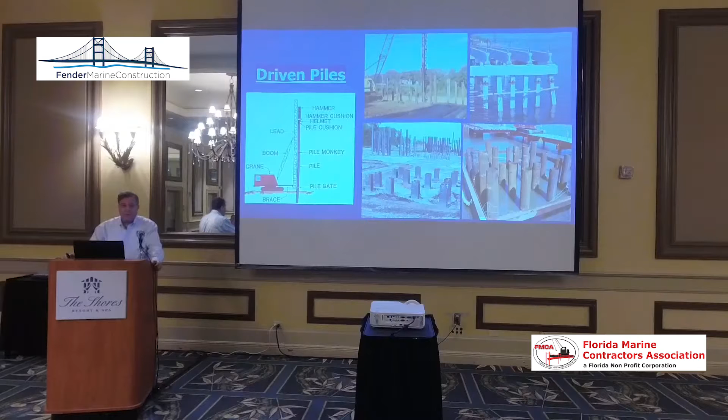For the longest time, by that I mean thousands of years, piles were mainly timber piles, nothing but timber piles, until relatively recently, like the last 100 years or so. Now we use timber, concrete, and steel piles. There is a manual you can download for free also from the Timber Piling Council on the design and construction of timber piles.

Timber piles nowadays are used for supporting all kinds of structures as well over water. They are also used as a ground modification technique where they drive these piles into the ground to improve the load-bearing capacity. Steel piles come in 2 varieties, H piles and pipe piles.

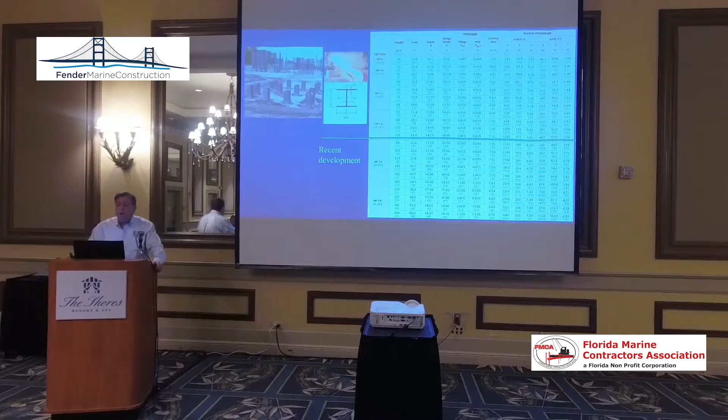Up until about 10, 15 years ago, we used to have about a dozen size standard profile H piles. Since then, they have doubled that. So now we have piles that are extremely huge, up to 18 inch in size and 200 pounds per foot. Imagine 200 pounds per foot of piling. So that is a very, very hefty pile that will be able to support all kinds of high loads, not only axial, but also for lateral support.

Pipe piles come in a variety of sizes, ranging in diameter from a few inches, they call it micro pile or mini pile, to a foot or 2, to maybe 5 feet, to maybe 15 feet in diameter. So all kinds of sizes are available, as well as length. Some of these pipe piles can be 1,000 feet long, 1,500, 2,000 feet long for offshore marine applications, for, let's say, oil rigs and natural gas rigs out in the ocean.

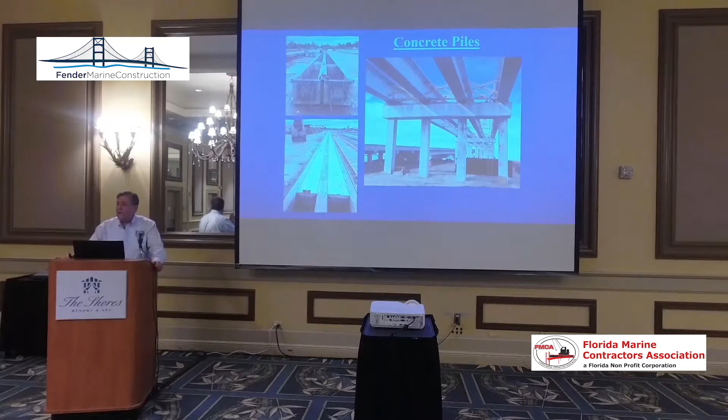Concrete piles, by that we mainly mean pre-stressed concrete piles. Specifically, almost always square pre-stressed concrete piles. The strength of this concrete is about 6,000 psi concrete strength. We may also have some post-tensioned spun concrete piles that have higher strength and larger in size typically. The strength of these may be 8,000 psi.

The newest application of concrete in piling is the use of ultra-high performance concrete, the strength of which is up to 25,000 psi concrete strength. This is the very first such pile driven anywhere done here in Florida. Piles are typically uniform and prismatic, but not always. They can be highly non-uniform in cross-sectional profile, as well as composite of concrete and steel, different combinations of materials and profiles, depending on the application.

There are literally hundreds of different hammer models of all sizes, of all makes, of all models and operations. They can be hydraulic, air, steam, diesel, single acting, double acting, small, large ram, high stroke, short stroke, big ram, all kinds of hammer combinations that may be used.

So when we drive a pile into the ground, the pile experiences a dynamic pile driving resistance. However, when we use it to support a structure, we need to know its static load-bearing capacity. There is a difference between the static load-bearing capacity of a pile and the dynamic resistance it experiences during initial driving. The best way to evaluate the static load-bearing capacity of a pile is to perform a static load test.

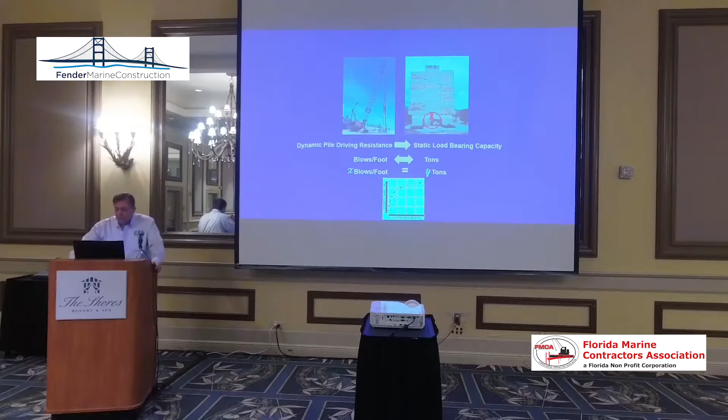Engineers involved in pile driving for a long time now have realized from common sense that the more energy it takes to drive a pile, the more effort, the more work it takes to drive a pile, the better the pile would be, the more load it should be able to carry.

So a Mr. Wellington, in the late 1800s, in 1888, wrote a one-page article in the Engineering News magazine equating that energy of the pile by way of weight of hammer and drop height, the blow count, and the load bearing capacity of the pile. So that was done in 1888.

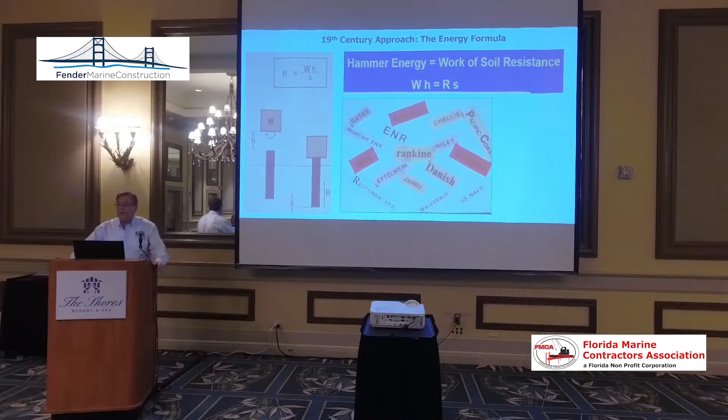Since then, a lot of people tried to improve on that, tried to adjust it, tried to accommodate it for new technologies. Because back in 1888, we only drove timber piles, nothing but timber piles, nothing but drop hammers to very light loads. So now, of course, we have much more complicated systems, and people tried to improve on that. But of course, using 1800s technology in today's practice is not very efficient or very good.

In the 1940s, another very smart engineer called Mr. Smith, realizing what happens during the impact of a pile driving hammer, recognized it as a problem of wave propagation. When the hammer hits the top of the pile, it generates a stress wave, a shock wave, a compression shock wave that travels down and up the pile, very very fast, like 15,000 feet per second, but it's finite.

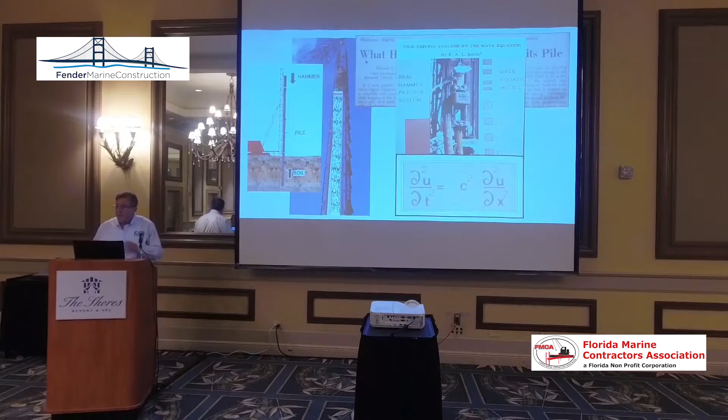So Mr. Smith, realizing that and knowing the formula, described the one-dimensional elastic propagation in long elastic bars. It applies to pile driving. It also applies to heat transfer, for example. If we have a very long steel rebar and we take a torch and heat up one end of it, that heat transfers along that bar in accordance with that wave propagation, described by that wave equation. So this is the wave equation describing that.

Mr. Smith wrote a computer program to apply this wave equation to the fundamentals of dynamics of pile driving, utilizing stress wave mechanics. It sounds like I'm saying a lot here, but the point is, this is the first application of digital computers in civil engineering. The very first computer program ever written in civil engineering was this program, written in 1948 by Mr. Smith, to follow the stress wave along the length of the pile so that we can actually relate the pile driving blow count and pile load bearing capacity.

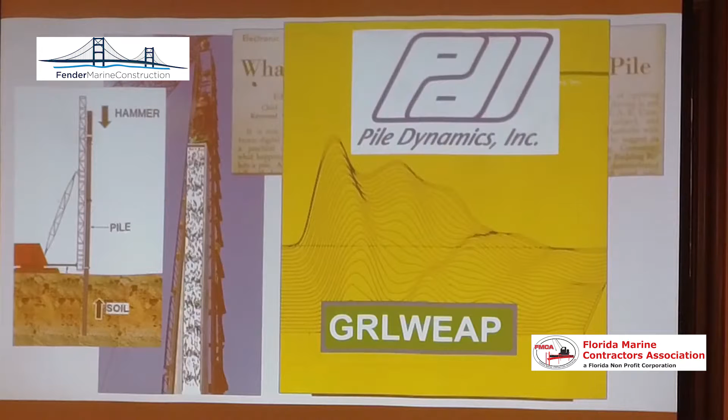So Mr. Smith wrote that program for in-house use at the Raymond Company. The United States Highway Department heard about it, and they commissioned our group in Ohio to write a public domain program back in the 1970s. In the mid-1980s, the government said, you wrote the program, if you want to commercialize it, we don't want to support it anymore. It's well known now, everybody uses it, but we don't want to support it. Go ahead and commercialize it if you like. So we took it over, it's our own program now, and the commercial version of it is called GRLWEAP.

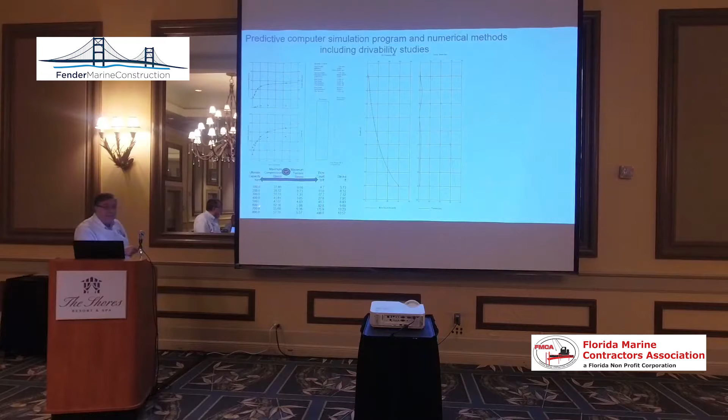That is the dynamic testing, the dynamic analysis program that is used worldwide, everywhere, to analyze the dynamics of pile driving. It's a very powerful program because it allows for a relationship between pile driving blow count and static load bearing capacity. So if we know how much design load the pile is supposed to have, let's say the pile is supposed to have a design capacity of 500 kips, we know we have to drive it until we get so many blows per foot.

That way the inspector on the job site can use this unit called the saximeter, which means a meter of sound, listening to the hammer and counting the blow count, blows per foot, to make sure that every pile is driven to the required blow count to achieve the required ultimate load bearing capacity.

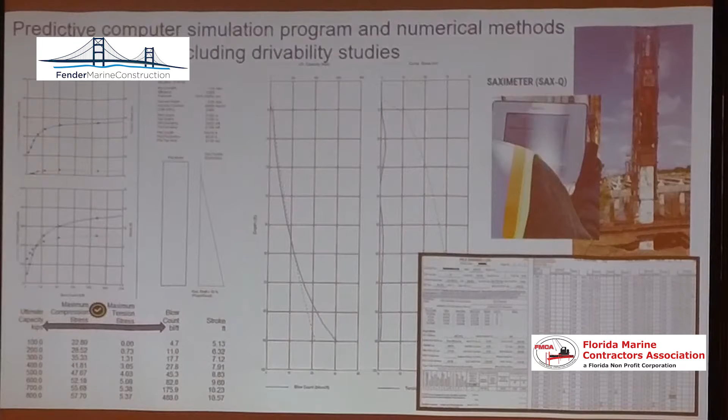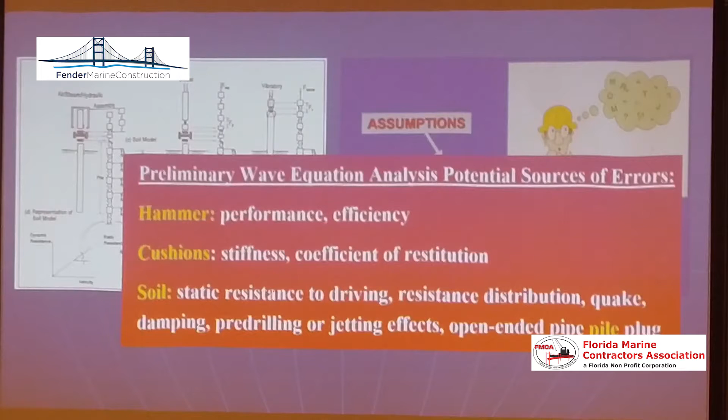Very nice, it's a very powerful way of doing quality control on pile driving. However, to set up that model in the program, remember it's a simulation. We're simulating pile driving in the computer analysis, so we need to use assumptions. We have to assume a bunch of information, parameters, and models. Because of that, the analysis itself has potential sources of error.

So the people who wrote the program, knowing that they need assumptions to set the model up in the analysis, got to thinking, what if we were to go out there on the job site and take measurements? What if we were to measure what we need to know instead of assuming it?

These included Professor George Goble, assisted by graduate students Dr. Frank Rausche and Garland Likins, under a program between 1964 and 1976 in Cleveland, Ohio, at Case Western Reserve University, funded by FHWA, FDOT, and various highway departments.

They invented the whole idea of dynamic pile testing. They invented the principles, the instrumentation needed, the sensors, the computer science, the engineering, and the formulas needed to analyze all of these measurements.

So that is what is now known worldwide as dynamic pile testing, utilizing the pile driving analyzer for field measurements and corresponding data analysis using the CAPWAP program. CAPWAP is a computer program, Case Pile Wave Analysis. It's a wave analysis program, but rather than relying on assumptions, it now uses the measurements on the job site as input to the analysis.

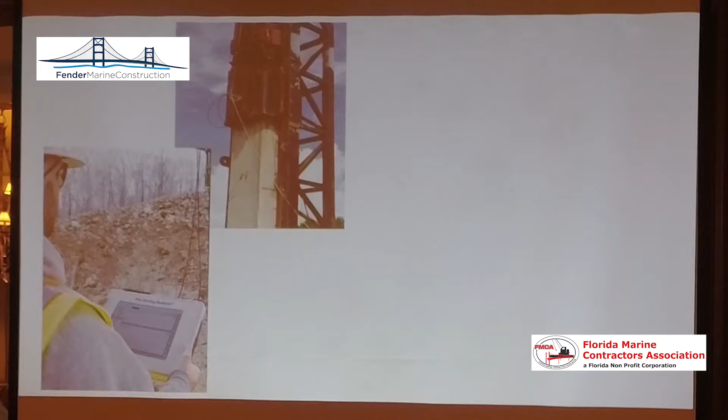These instruments measure the load and the movement of the pile. The load is measured with a strain gauge, and the movement is measured with an accelerometer. Remember what we did with the static load test, we measured load and movement. We're doing exactly the same thing now, measuring the load and movement of the pile under the impacts of the pile driving hammer. There is an ASTM standard for this testing procedure called ASTM D4945.

Dynamic testing can be done with the testing engineer and the PDA unit, the pile driving analyzer, on the job site, right next to the hammer. During the driving of the pile, the testing engineer is there to do the testing.

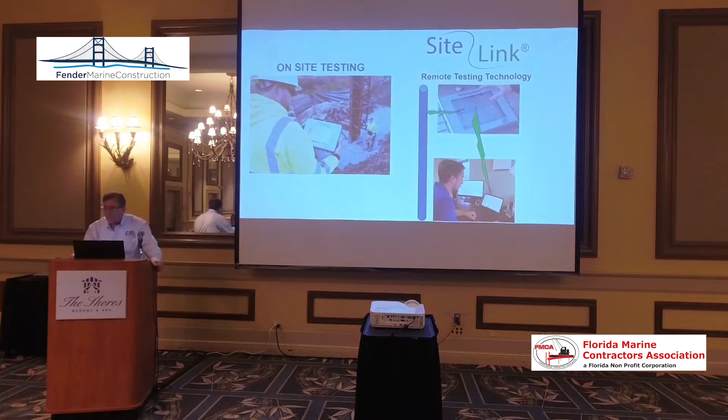Alternatively, this testing can be done completely remotely. The engineer can be in the office, and testing can be done on the job site in real time using SiteLink technology. So dynamic testing is nothing but the measurement of pile load and movement under the impact of the pile driving hammer, and the analysis of these measurements using stress wave mechanics.

These instruments are reusable and they can be attached to any kind of piling.

Pipe, H-pile, concrete, timber pile. These are very small instruments, 3 inches long, and they can also be attached to cast-in-situ deep foundations like auger cast piles and drill shafts for testing also. So when the hammer hits the top of the pile, it generates a shock wave, the compression wave that travels down the pile length.

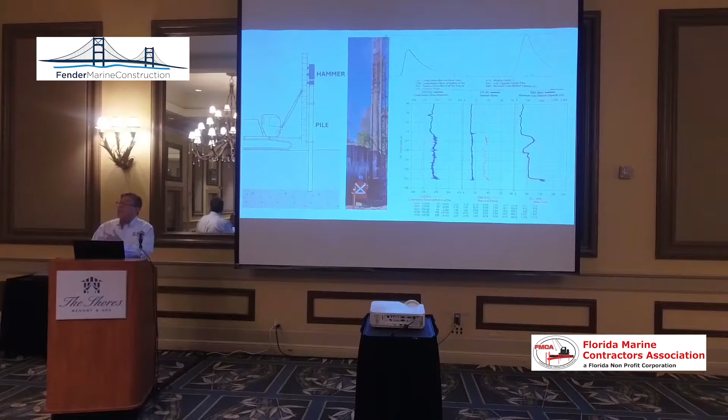So now we have everything we need to know. We know the blow count versus depth, and we know the static load bearing capacity versus depth, in addition to a lot more information, including hammer performance, pile performance, and soil performance.

Hammer performance is extremely important because we are using the blow count from the hammer, so many blows per foot, 50 blows per foot, 30 blows per foot, whatever blows per foot we are driving with, we're using that blow count to correlate to the load-bearing capacity, to the resistance of the soil. Except that blow count is not only a function of the resistance of the soil, it is also affected by the performance of the hammer. That affects the blow count.

So how do we figure out what blow count means for capacity if we don't know what the performance of the hammer is? We have to measure that. We do that by measuring the energy that gets to the pile.

Now let me ask you this. If I have a hammer with a rated energy, maximum energy, how much of that energy do you think gets to the pile percentage-wise? How much percentage the pile actually sees as a maximum energy of the hammer? Say a number, any number. Mike? 60%. You? 50%. It could be anything.

Now, why does it vary so much? It varies so much because that depends on the mechanical condition of the hammer, the state of maintenance of the hammer, the condition of the cushions inside the hammer itself, and the cushion on top of the concrete pile. All of these play together into that variability. It doesn't matter what it is as long as you know what it is, because then you can quantify the performance of the hammer so that you can make sense of the blow count as far as evaluating it for load-bearing capacity. We just have to quantify that hammer performance.

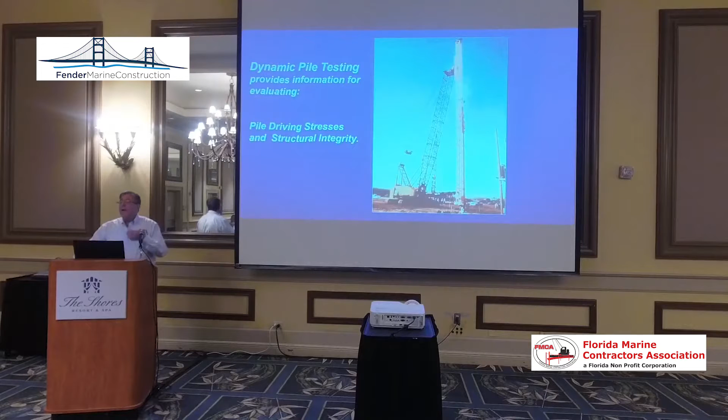So that is done for each and every blow of pile driving. During the impacts, the pile hammer on the pile undergoes a very complex state of stresses that includes compression, tension, shear, torsion, bending, and buckling. Every possible combination of stress you can imagine, the pile will experience, up to the maximum strength level, repeatedly 1,000 times during pile driving. So how do you think the pile feels about all that?

We were curious. We got to that pile. Hey, pile, how do you feel about that? Not so good.

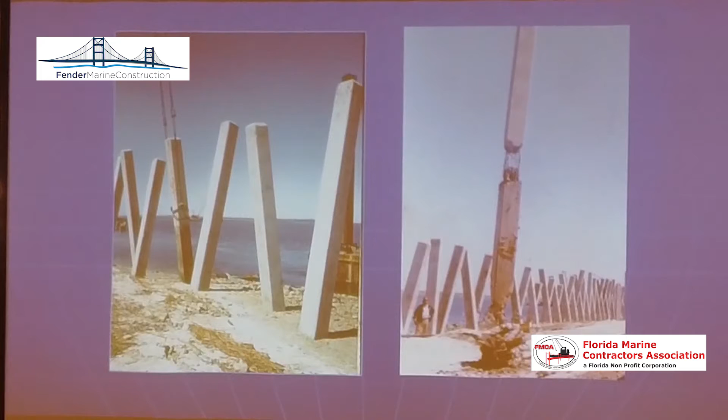It shouldn't be really surprising because of the process that we go through in driving these piles into the ground. Piles get damaged at the pile top, which means that the hammer is too big. When the hammer hits at the pile top and the pile top crushes, it's not the material, it's not the wood, it's a pile hammer combination. So that's too much energy.

By taking measurements on top of the pile, we know how much stress we have. We can control the energy of the hammer to lower the level of the stress in the pile to avoid damage. We do that by lowering the stroke and/or increasing the cushion thickness in the case of concrete piles. So it is a measurement that we take at the top of the pile. It's a dynamic measurement, which means that it's a measurement over time.

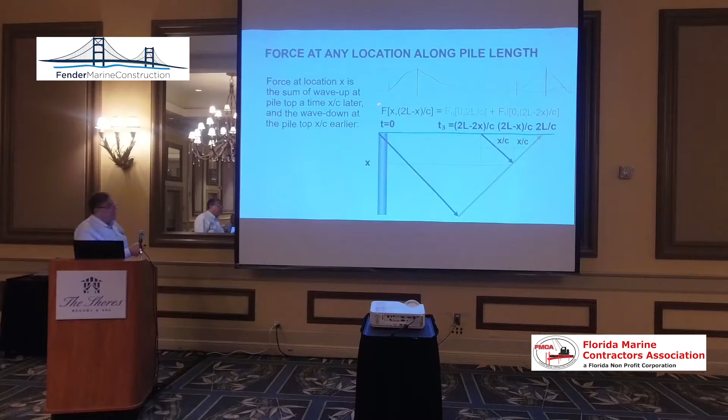By the way, that time I'm talking about, between impact and reflection, is like 20 milliseconds. Very fast, but finite; computers can handle that. So it is a measurement on top of the pile versus time. We know how fast the wave goes in the pile. So now I have time and speed. With time and speed, I can go back to distance. Distance, time, and speed are linearly related. So if I know time, which I'm measuring, and I know the speed, depending on the material, I can go to

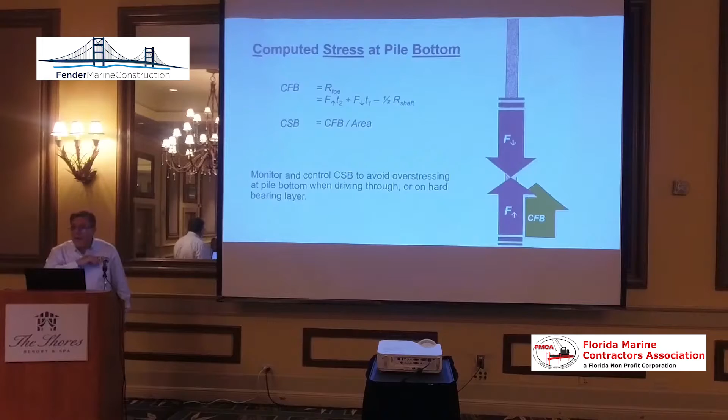distance. Therefore, from the measured data at the pile top, we can calculate the stress level at any location along the pile length. At any location X, we know how much stress the pile has from the top measurements, including X equals L, the full pile length. So when we drive a pile into the ground, if we're driving it to a very hard end-bearing layer, the stress at the bottom of the pile could be twice that at the top of the pile.

Because at the top of the pile, when the hammer hits the top of the pile, we have so much stress, right? So much compression stress. That compression stress travels down the pile length to the pile bottom. It activates an equal and opposite reaction from the rock. Both in compression, they both add up at the bottom. So therefore, the bottom stress could be twice that at the top of the pile.

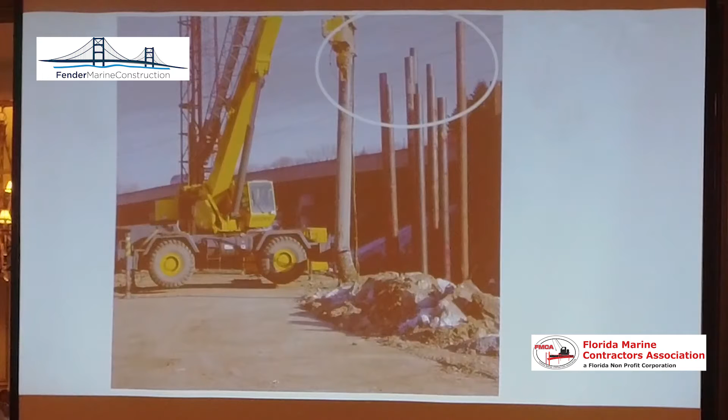This is a project where they drove all of these piles into very, very hard rock. Supposedly, these piles penetrated differently into that hard rock, but not really. After extraction of some of these piles, look at the bottom of the piles. This is an illustration of the doubling effect in the stress as it happens as I drove these piles blow by blow by blow.

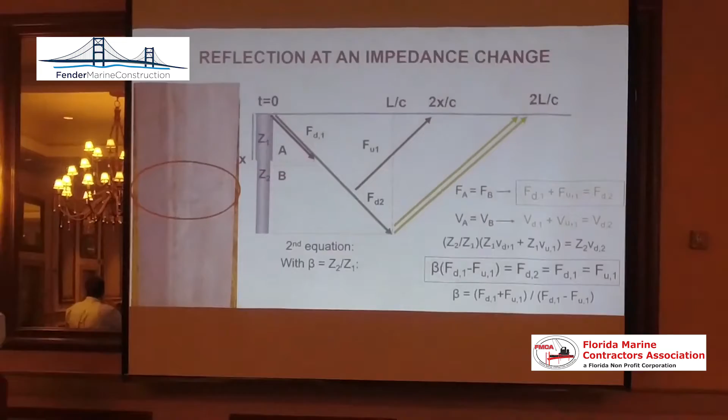So when we drive a pile and we have end bearing, we know what happens at the tip of the pile. Let's say we are driving a pile without much resistance, like early driving. Not much resistance. That compression wave on top of the pile travels down the pile length, compression, compression, compression, gets to the bottom of the pile, tries to pull the pile down. By pulling down on the pile, it elongates it, puts it in tension. If we're driving a concrete pile and that tension was too much, the pile will crack. All of these cracks and damages will send back wave reflections in the data that can be evaluated for location of damage and amount of damage on the pile for each and every blow.

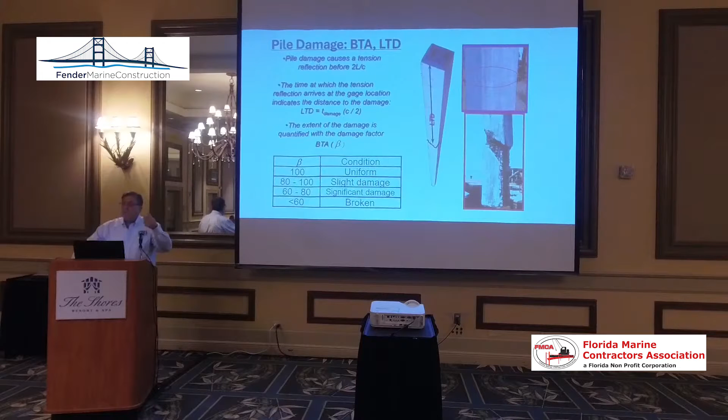Remember, this is happening, the performance of the hammer, performance of the pile, stresses, integrity, and so on, between hammer blows. The hammer runs at about 50 blows per minute, approximately one impact per second. Every second, we have a test done and we have results available immediately within that 1 second.

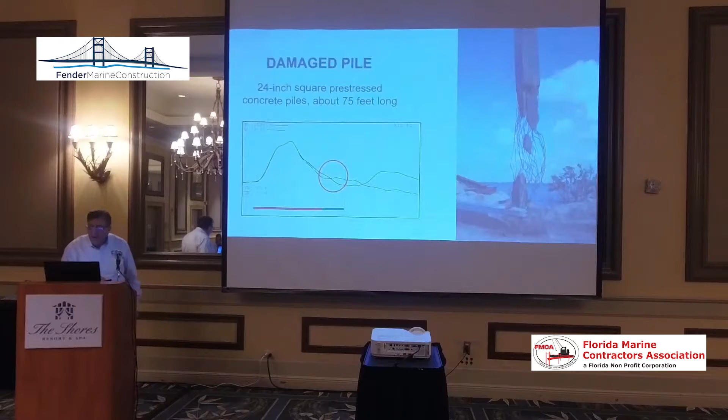This is some data showing partial damage in the concrete pile. If the pile tried to walk, we're going to have partial damage on it, just on the one side. Or we may have complete damage on a pile, in a concrete pile, or a steel pile. And that damage on the pile will be indicated in the test data. Remember, impact at the top of the pile, reflection from the bottom. Now we have that from the bottom down here, but we also have an early reflection from right here. So that data indicates the amount and type of damage.

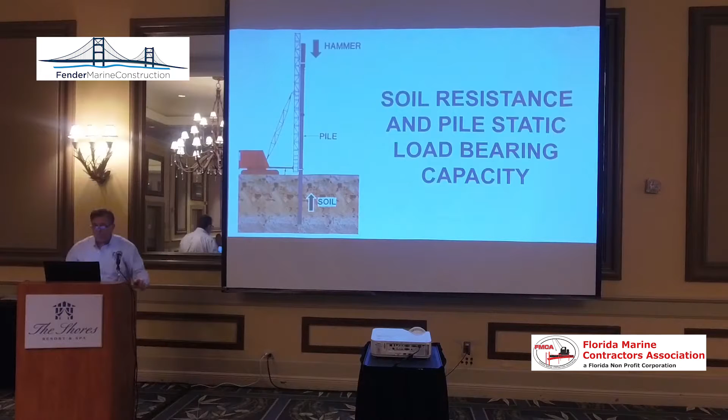So we talked about hammer performance and pile performance. Now let's talk about soil performance. Remember, all of this is happening within that 1 second before the next blow comes. When the hammer hits the top, the pile moves into the ground. As the pile moves into the ground, it activates soil resistances in skin friction and end bearing. These soil resistances also generate a stress wave that goes up the pile.

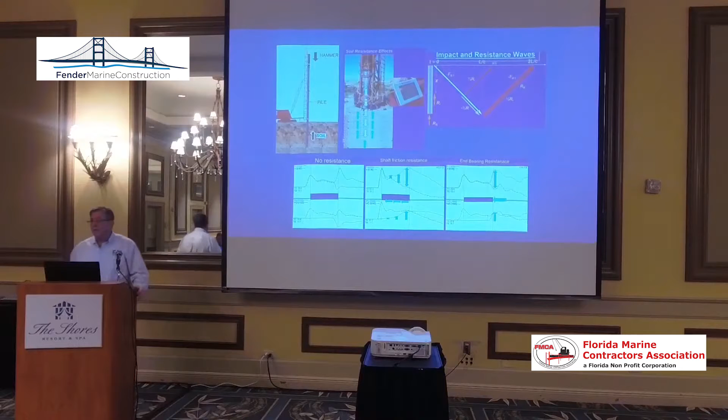So now I have two waves on the pile, the wave going down from the hammer and the wave going up from the soil. Both of these waves get captured with the instruments on the pile that the PDA sees. So under the impact of the hammer, we have the wave going down and the wave going up from the soil. From these waves then, we're able to tell how much skin friction we have along the length of the pile and how much end bearing we have during each pile driving hammer blow, during each penetration depth.

Since this is so convenient to do, we'll test the pile during initial driving and later on in time. When we drive a pile initially into the soil, we disturb the soil, we weaken it. So we have so much capacity. But over time, the soil consolidates, grabs onto the pile, and the load-bearing capacity increases in a process called setup. So the pile soil setup, which means it increases capacity.

In this case, within 30 minutes, the capacity increased from 200 to 280 tons. Free capacity in half an hour. So that's the good news. That's what happens in most cases, but not always. Sometimes the pile capacity actually decreases with time in a process called relaxation. So under certain circumstances, conditions, pile soil interaction type, the capacity will decrease in time. This process is known to happen in Florida.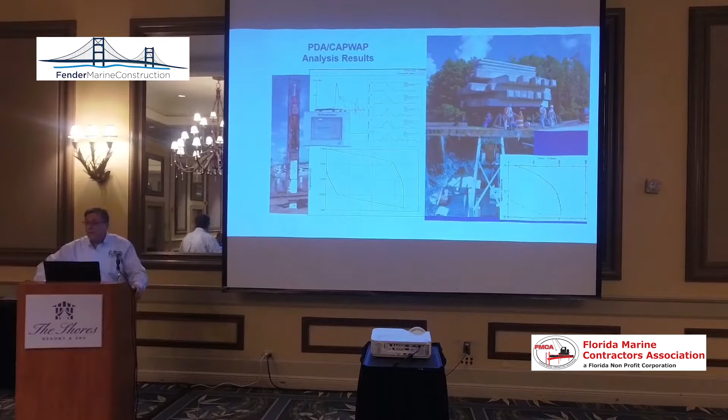Well, how good is it? How does it compare to an actual full-scale static load test? Over the last 50 years, there have been many correlation studies by professionals, by highway departments, by universities, by dissertations, by students that look into this correlation. I'm going to only show you two cases, since we're in Florida, from Florida, that were published by the American Society of Civil Engineers. This is a job not far from here where they did both static load testing and dynamic testing. And this is a correlation, excellent correlation.

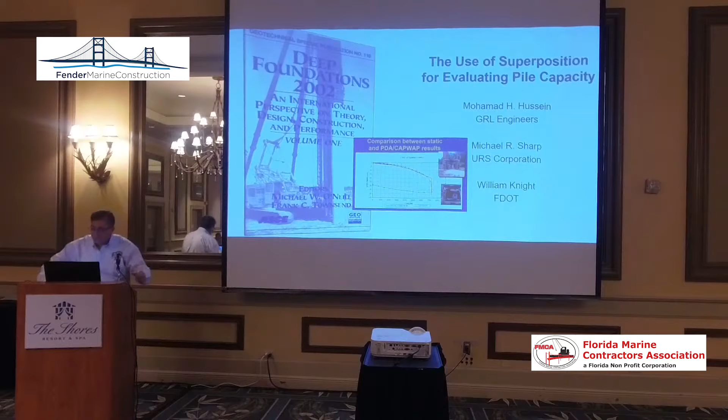There's another job up in the Panhandle that also shows a good correlation between the simulated from dynamic measurements and full-scale static load testing. So if the data quality is good, if the analysis is done properly, one can expect to have excellent correlation between a static load test and a dynamic load test without having to run a full-scale static load test.

This type of dynamic testing is typically applied on projects by way of a test pile driving program. The design engineer will designate a number of piles on the project, a handful of piles, go ahead and hire the contractor, drive the test piles, and dynamically test them. The purpose of that program is to establish production pile lengths for the job, establish a pile driving criteria for the project, check the engineer's design assumptions, and also check the contractor's equipment and means and methods to do the job. This has been the way for 50 years.

Recently, as this year, in Florida, the FDOT decided that they want to do 100% testing on each and every pile. Each and every pile driven in the state of Florida for the DOT is dynamically tested, 100%, with or without a test pile driving program. All of these projects were done with 100% testing, including the Pensacola Bridge next to you there. So that was a lot of testing there.

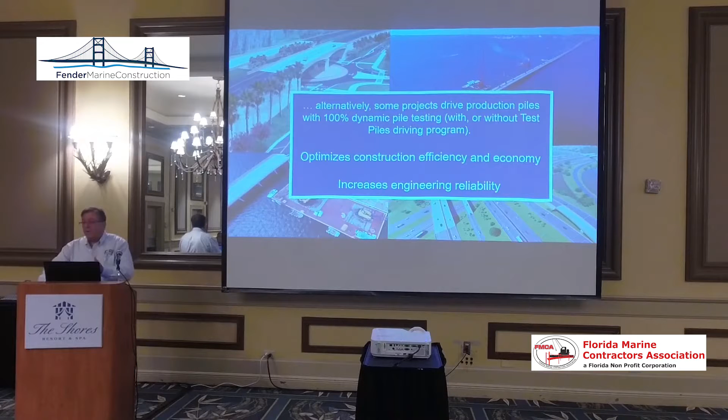They figured out that the process of doing 100% testing optimizes construction efficiency and economy and increases engineering reliability. Now the design engineer knows by verification of testing that each and every pile on the job is verified for load bearing capacity and integrity, which would allow for the use of a much lower factor of safety in design, which will make the foundation a lot more efficient and economical.

On the flip side to that, however, one would have to predetermine the production pile length for the job without the benefit of the information that one would obtain with a test pile driving program. In many cases, this works fine. In many other cases, not, especially in Florida, because it's very difficult to predict the length of the pile without actually checking it because of the geology and the karst conditions that we have. So that was the discussion on driven piles.

Next, I will move into deep foundations that are cast in place, cast in situ, starting with auger cast piles. Auger cast piles have traditionally been used to support structures, buildings of all sizes. Most of the buildings in South Florida, East and West Coast, high-rise, these tremendous buildings, are mainly founded on auger cast piles. Recently, they are now being used on bridge foundations. This is how an auger cast pile is installed.

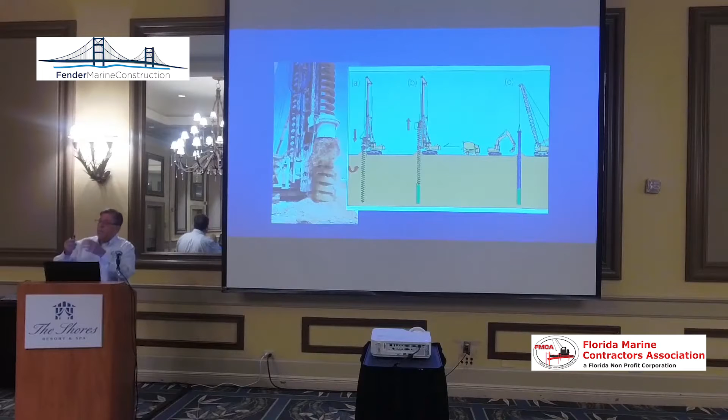To install it, the contractor would have a continuous flight hollow stem auger. The design engineer will determine the depth, so the contractor would drill down to that depth and withdraw the auger. During the auger withdrawal, he pushes grout through the bottom of the hollow stem. And by the time the auger is all the way out, we have a hole full of grout. Then we'll bring the steel cage and push it down. The steel cage comes last, and is pushed down that grouted hole. That was the conventional way.

A newer way is called a displacement type auger cast pile. Notice that at the bottom of the auger, they reverse the direction of the flights. That way, we're not mining the soil, we're not taking soil out of the ground, we're actually pushing it, displacing it in the ground. So, displacement type auger cast pile. This has many advantages. Not only does it improve the geotechnical conditions, but if you happen to have a project where the soil is contaminated, taking any ounce of soil out, you have to process it. In this case, you don't worry about it. It's still down there where it is.

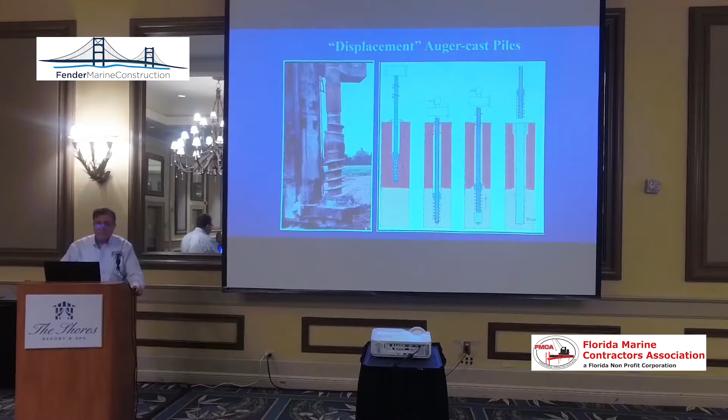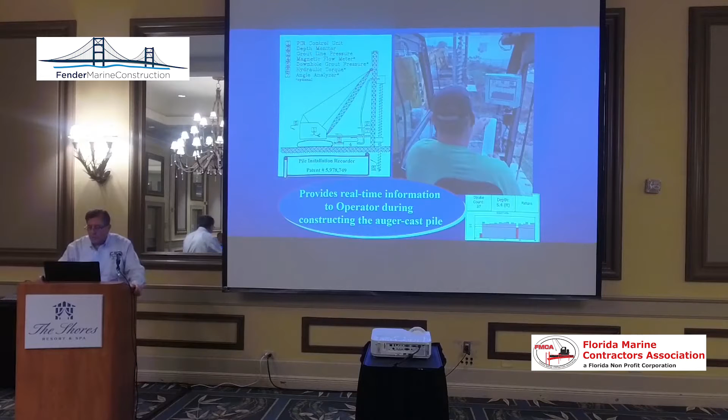These rigs to install these piles are typically fitted with equipment that measures while drilling. The hottest topic in engineering now at the University of Florida and everywhere is research on MWD, measurement while drilling. Take measurements of torque, pressure, grout pressure, depth, volume, all kinds of information to make sure that each one of these piles is done properly.

Drill shafts, on the other hand, are also cast-in-place deep foundations, but very different than auger cast piles. Typically characterized by much larger sizes, while auger cast piles can be 12-inch, 16, 20, maybe 24, up to 36-inch. These are the largest I know of, 36-inch in diameter auger cast piles. Drill shafts start at 36-inch or 48-inch, and they go up to 3, 4, 5, 6, 8, 10, 15 feet in diameter, and they can be 100 feet deep.

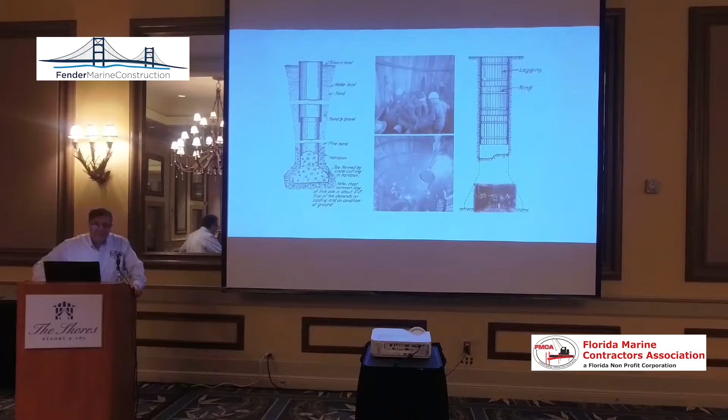By the way, the very first high-rise skyscraper was in the United States, in Chicago. This is it. This is the very first skyscraper in Chicago in 1885, 10 stories high, steel frame building. That was founded on a hand-dug deep foundation. They actually sent people all the way down there. And then they may have a bell on it. So now they have this hand-dug, 100 feet into the ground foundation for these buildings in Chicago. And they actually held a progress meeting down there in the bottom of the hole. They sent the engineers there.

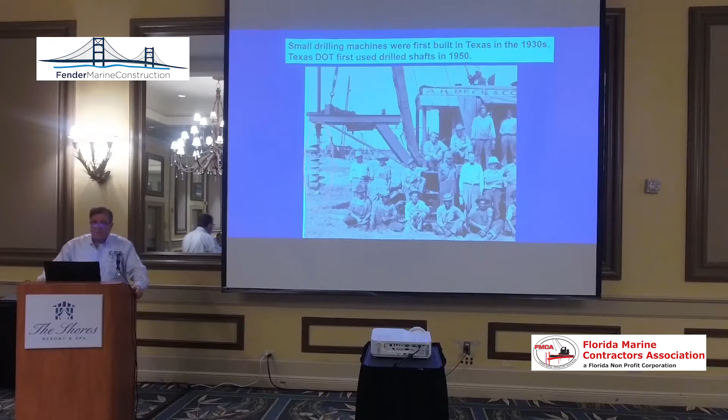The very first recorded use of drill shafts was in Texas in the 1930s as an outgrowth of oil exploration. So they would get this rig and drill for oil. If they found oil, great. If not, well, now we have a hole drilled. So they decided to put a steel cage in it and fill it with concrete. That was the original beginning of drill shaft construction. Texas took that in 1950 and it became standard practice for the Texas DOT for their bridge foundations.

The very first major use of drill shafts in Florida came in the 1980s following the disaster in St. Pete for the Sunshine Skyway Bridge. Remember when the barge hit it? The construction of the new bridge is founded on drill shafts.

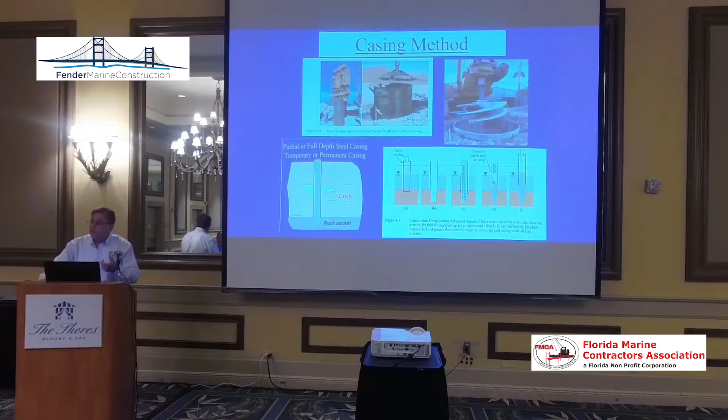So to construct the drill shaft, because of a water table, we may have to use a steel casing, temporarily during construction or permanently as part of the constructed shaft. We may also want to use slurry. Slurry is a thick fluid that we put into the drilled hole to apply hydrostatic pressure inside that hole to keep the wall of the hole from falling in as we construct the drill shaft. But that has to be done extremely carefully. That is why there are so many tests required on the slurry during the construction of the drill shaft.

Because the slurry has to have a certain density, because the hydrostatic lateral pressure it applies is a function of the depth of the hole and density. So we have to adjust the density sometimes by putting in sand. If we put too much sand, then the sand will settle at the bottom of the hole, so we're going to have a soft bottom. So the shaft will then suffer in end-bearing resistance. Also, that can stick to the side of the hole, which will then provide a slick plane between the concrete of the shaft and the soil.

So we're not going to have any skin friction either. So that will affect the load-bearing capacity of the shaft. That's why they do so much testing of that slurry, expert testing.

So now we have a hole, 100 feet deep hole full of slurry. We have to fill it with concrete. We do that from the bottom up. We do that with a tremie pipe, which is a very long pipe with a hopper up on top. We put the concrete in it. We take it all the way down to the bottom of the hole and start pouring concrete and picking it up a little bit at a time until we're all the way up on the top, meanwhile collecting that slurry up on top.

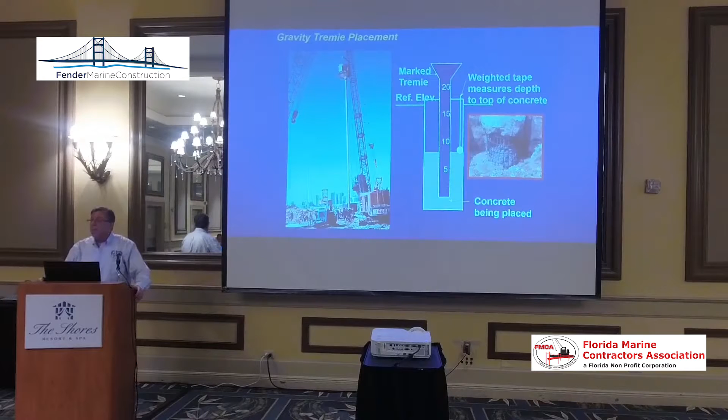Also, the design of these things, the steel cage and the concrete, have to be done properly so that the concrete will flow out through the cage and engage the side resistance for load-bearing capacity, friction resistance.

So when we drill that hole, before we do anything to it, only the hole itself, we have to test it for a few things. We have to test it for profile, the profile of the hole, and plumbness, verticality. We're drilling a hole 100 feet or more in the ground. It has to be perfectly plumb all the way through, within very little tolerance, like 1, 2, 3, 4% at most. We also have to test it for cleanliness and competency at the bottom so that we can have end-bearing resistance to the drill shaft. All of that before we put the steel cage and before we fill the hole with concrete to make the shaft.

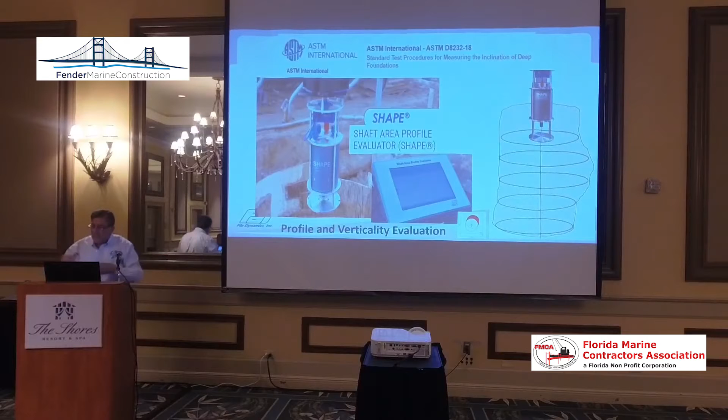The profile of the hole and plumbness, verticality are tested with this shape equipment; we send it down the hole and up real quick. It sends signals for reflections, like a radar type thing, and it gives us a 3D picture of the hole. It will also give us the offset between the top of the hole and the bottom of the hole to make sure that the plumbness requirement is met. It will also calculate the volume of the hole.

That is important because later on, when we fill this hole with concrete, we make sure that we have enough concrete in that hole, at least equal to the volume that we drilled, not the theoretical volume from the size of the drill, because the hole could be different.

The bottom cleanliness of the hole and the competency of the material at the bottom, to make sure we have good end-bearing resistance on that drill shaft, are tested with this equipment called SQUID, shaft quantitative inspection device, that has 3 little probes at the bottom, and they probe the bottom of the hole for stiffness, strength, and thickness. Typical requirements are that the bottom of the hole should not have any more than half-inch thick soft material on more than half of the area. So the area at the bottom of the hole is probed and tested that way.

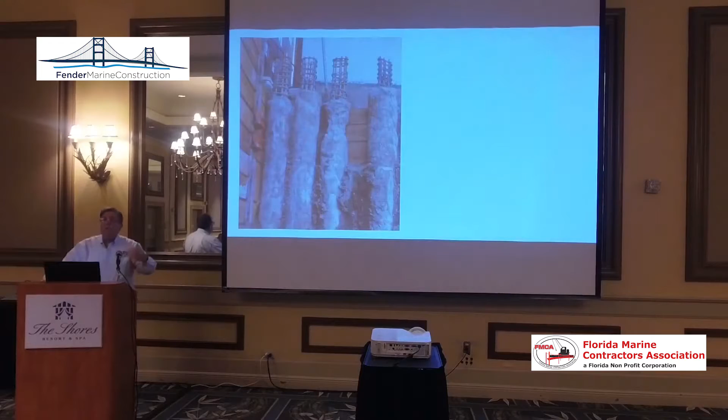So we do the best we can with the inspection and testing and the construction. We put the concrete, everything is happy, everybody's happy, everything is looking good, perfect. Well, maybe not perfect, but good enough. But sometimes it can be very bad. Remember, we're constructing something in the ground, in the blind. There are many factors that affect the integrity of these cast in situ foundations in the ground: subsurface conditions, design, installation means and methods, and workmanship. Expertise is really needed to do that properly.

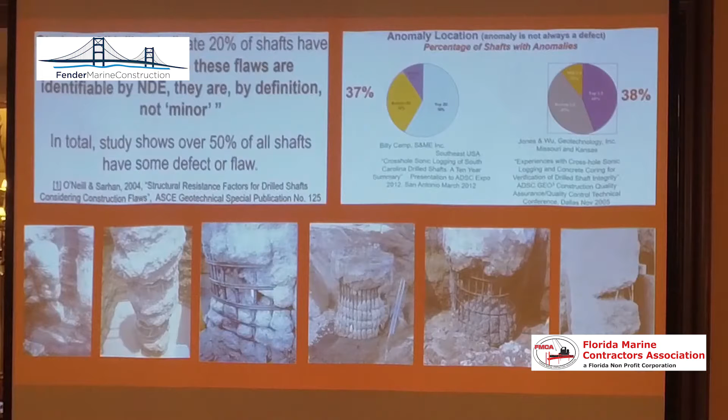There have been many studies at different universities, highway departments, and many different places. The bottom line is that everybody agrees that a good number of these cast-in-place piles have some kind of an issue that ranges from flaw to defect. The oldest way to test for that was started maybe 40 years ago.

5 minutes? Oh, I thought I had an hour. Oh, okay. No, I have, okay. Maybe I have 15 minutes.

10 minutes, okay, very good. So I'll speed through it. So what I want to get to is that... well, I'm a substitute, so.

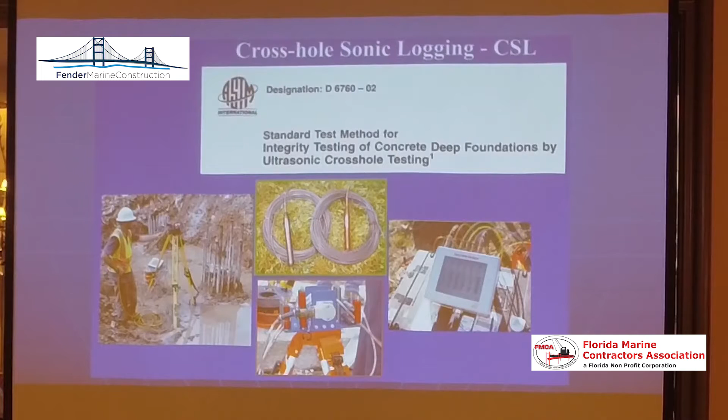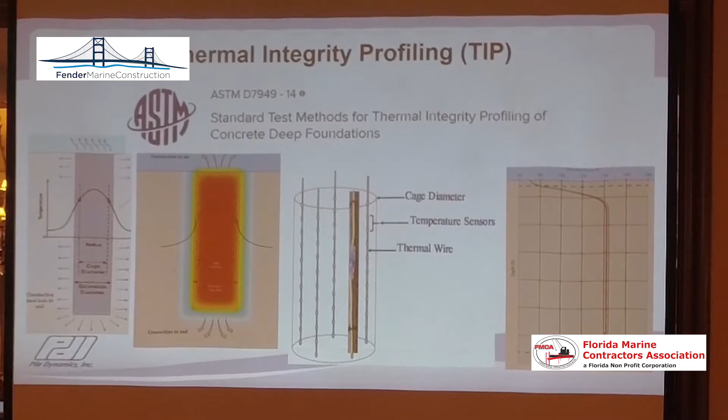What I want to get to is to show you the newest technology in the analysis of drilled shaft integrity, which is thermal integrity profiling, invented here in Florida, at the University of South Florida, and we took it over to commercialize it 10, 15 years ago. We measure the temperature of the concrete during the curing process in the ground. It has won so many innovation awards, and this is how it goes.

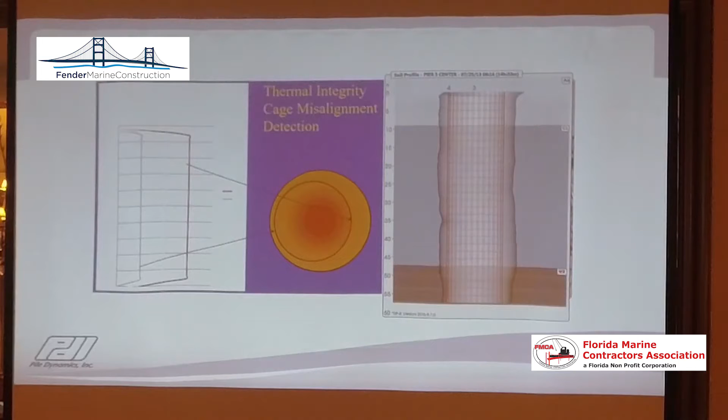We're going to put these thermal wires along the length of the shaft and take temperature every foot around the circumference of the shaft. Also, we're going to tell if there's a shift of the steel inside the concrete from the relative measurement of temperature around. That will allow us to draw a 3D picture of the concrete of the shaft in the ground and the location of the steel inside that concrete.

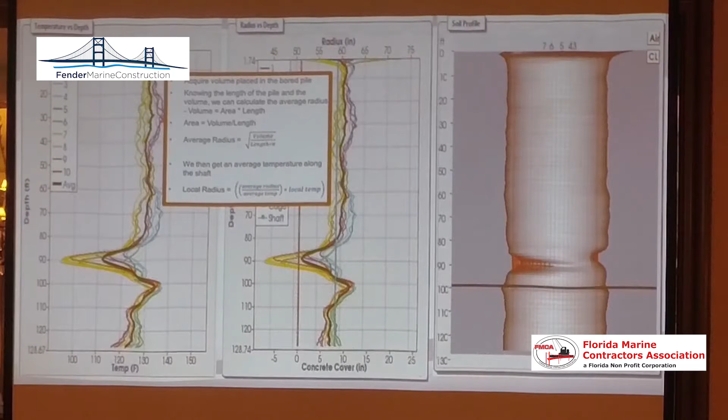So that is done completely automatically within the first 24 to 48 hours of casting of the auger cast pile or of the drilled shaft. That will allow us to have the integrity assessment done early, and also to have the cover of the concrete on the steel evaluated.

So we talked about low strain testing with a small handheld hammer for integrity, and now we talk about high strain testing for load bearing capacity. For that, we need a big enough hammer. We have to hit the shaft with a drop hammer to move it, to activate resistance, to measure load bearing capacity, with the same technology as a PDA on drilled shafts. So we do that and we get that simulation.

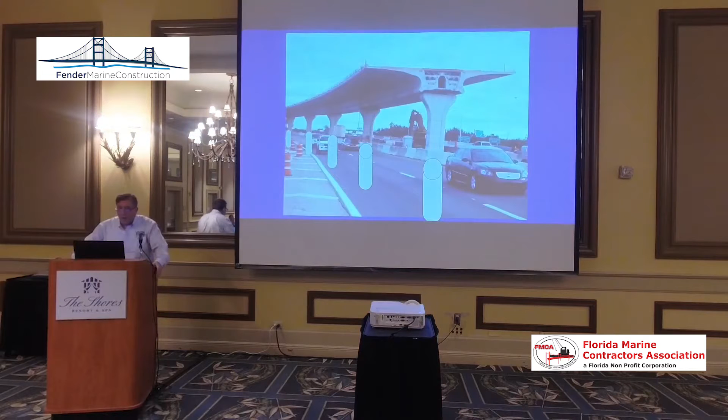I was going to tell you about this case history in Tampa. You all know about it, where the bridge actually collapsed and the foundation failed. It moved 11 feet into the ground. So we were brought in after the fact. We did some testing on these piers. Each pier sits on one shaft. We tested the pier and the shaft.

This test here shows the shaft passed, the other one did not. They had to go back. There were 300 piers on that job, and they had to fix 100 of these piers at the cost of $120 million. And the job was done. It's a fantastic, fantastic project.

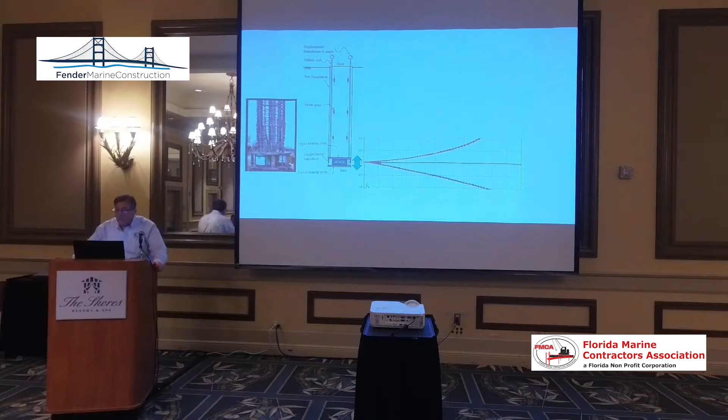So this is how the test is done. We apply load at the bottom. We measure movement up and movement down, movement up and friction, movement down and end bearing, until we get to the full resistance of the soil. We can then take that data and convert it into an equivalent shaft top load displacement graph, as if we had loaded the shaft on top.

So all of these methods I outlined to you today, we started 50 years ago. Now it has become standard practice worldwide. They're widely available in standards, codes, specifications, reference books, textbooks, journals, technical papers. There's no shortage of information on the technical background, application, limitation, cost, correlations of all of these test methods I outlined to you today.

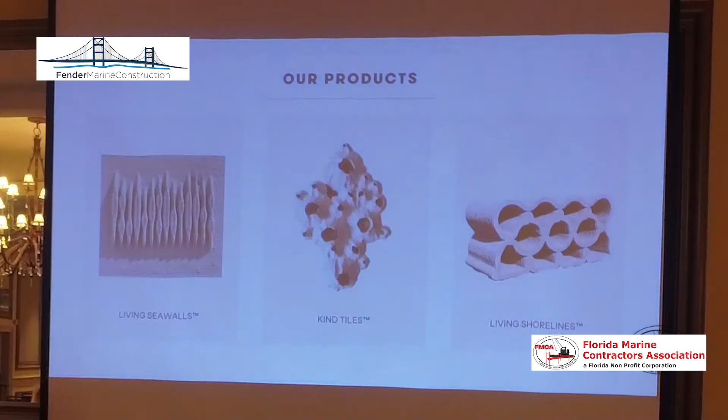So we started out with the living seawalls, which was the first thing we were 3D printing, as a replacement for traditional concrete panels. Then we noticed there was a need for other products to enhance an existing seawall. Now we have the Kind Tiles and the living shorelines. These are really site-specific solutions. We're doing projects in New York and in Florida right now, working with different living shoreline structures.

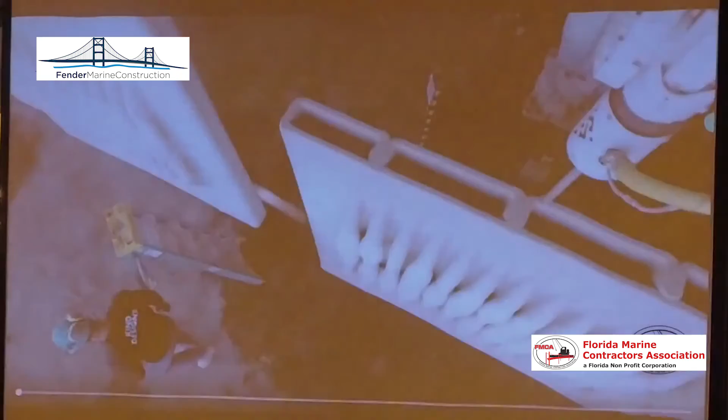This is to showcase how we actually 3D print the panels. While we're 3D printing, this panel showcases one that's 10 by 10, and it's completed in just 1 hour. In the beginning is actually the live speed of our 3D printer. Each layer can be completed in 17 seconds, and one layer cures while the next layer is 3D printed.

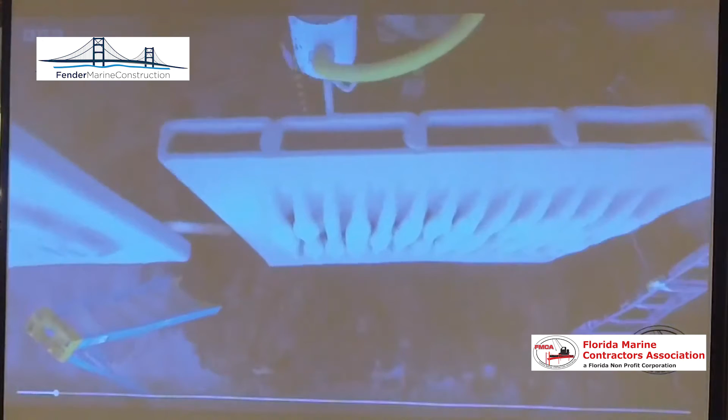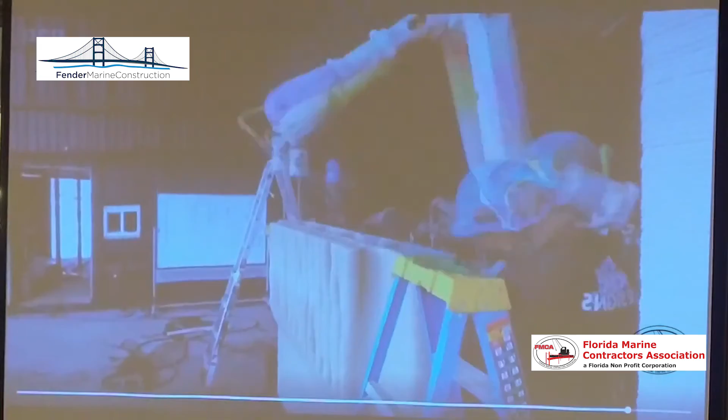While we're 3D printing that, you can see the whole panel, this exterior core is created, and we're putting horizontal rebar in. This is to whatever the engineer specifies. So say there's galvanized steel rebar, that's what we're putting in the panels. We're working with GFRP rebar on other projects, so it really is dependent on whatever is specified.

We put that in horizontally, and then we go and put vertical rebar and lifting hooks. And we fill that empty space of the panel so it's one cohesive panel. We're able to ship these panels out in 3 days after we've done that. At our facility right now, we have this great track system that we've custom designed, so you can just move panels down after you've 3D printed, and the process just keeps going. We can really print a whole project in just 1 day.

For the dimensions of the panels, whatever the project dimensions are, it's completely customizable. Right now, we see a lot of the standard panel dimensions in our area locally to Miami, and a lot of the projects we've completed have a height of around 12 feet, and they're about 10 feet wide. For our maximum height, our 3D printers can go up to 20 feet, so we are able to manufacture panels that are up to 20 feet tall.

The panel itself has 8 inches of a structural base, and then this mangrove root design you see on the wet face of the wall actually extends out 4 to 6 inches. So the panel is all still within regulatory codes of 12 to 18 inches for the requirements. And the material that we use is a BCSA mortar cement, with 5,000 PSI strength.

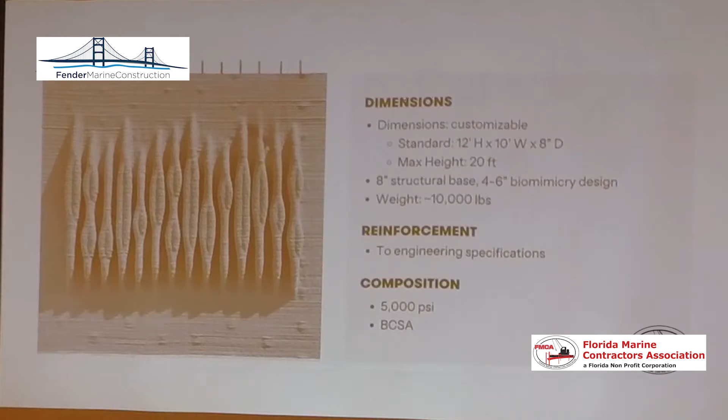For the strength of the panels, we've performed testing with University of Miami, which has a College of Engineering lab that works with FDOT. We've compared our panels to precast concrete panels, and they meet the same strength standards, and actually ours exceeded the strength standards of the precast panels in some scenarios for compressive and 3-point load testing.

Previously, Miami-Dade County required a modification going through DERM, their environmental agency, and this could take 30 days. They now no longer require that for living seawall panels, so they're used in any project.

Now for a living seawall, you can actually just do an as-built. Say you already have a concrete project and your client says, oh, I want to use living seawalls. You can easily make the switch and just do an as-built after the fact.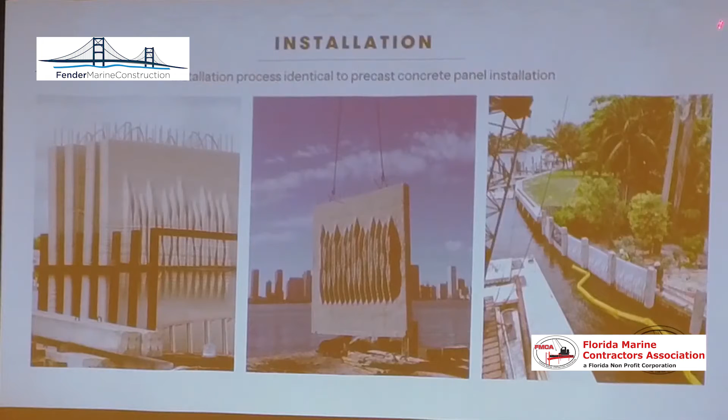For installation, we try to make it as easy as possible for you guys, so we can either 3D print our panels on site at our facility and ship them out, or we can put them directly on a barge and send them out that way. Because we are on the Miami River, we have these great racks that we store them in. Each rack can hold up to 10 panels, so we're able to move them easily in and out. Our panels include the rebar already for lifting and moving the panels.

So you can see here, there's one on the barge. This is out on Venetian Island in Miami. And on the right side here, this is an ongoing installation in the city of Fort Lauderdale. To show you how the installation really works, this showcases how you would move panels, putting them behind the king piles and just abutting right against that existing seawall.

For all our projects so far, we are only the manufacturer, 3D printing all these living seawalls and shorelines. So we work with any different contractor local to the area, and we oftentimes have homeowners or even cities reach out to us saying they want to do a living seawall, and they ask us for contractor recommendations local to the area. We're always looking for ways to work with people more local to that area and bring projects that benefit both of us.

These are some of our installations, and you can see the movement of the panels here. This is in Palm Island and Miami Beach, just this year. This is Star Island, also in Miami Beach. You can see them putting in the panels. This is during a new build of the home on Star Island.

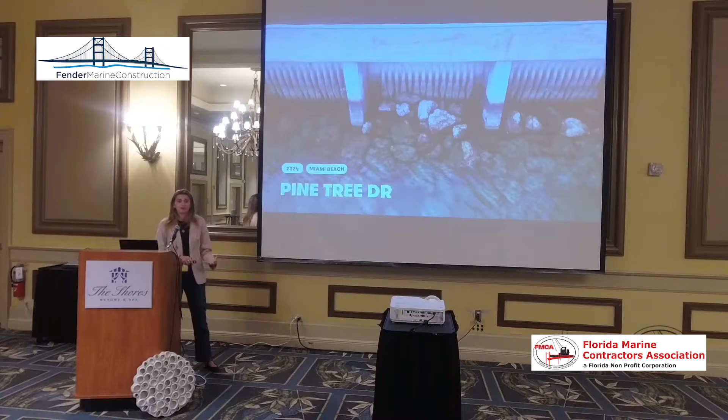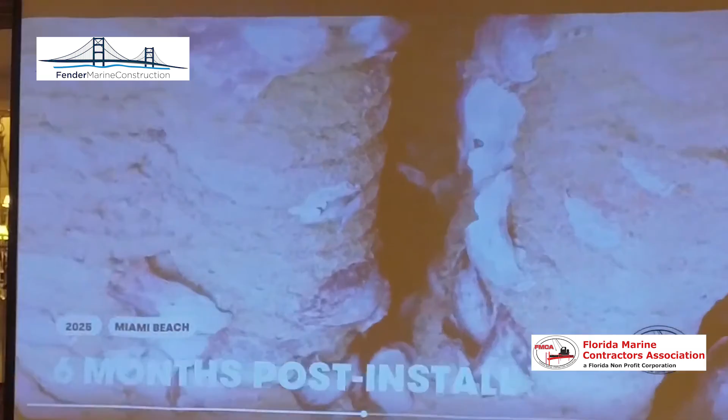Once you put in a living seawall, you get all these great benefits out of it, and your client's able to get all these amazing benefits. The first being the enhancements and improvements in water quality. This is that same Miami Beach project just 6 months after installation, and this actually helped us win a huge project in the city of Fort Lauderdale that's going to be 900 linear feet consecutively of living seawalls, because the client there was really concerned about water quality and the impacts they were having to their canal. They're doing this project as something they're giving back to the community and restoring the water.

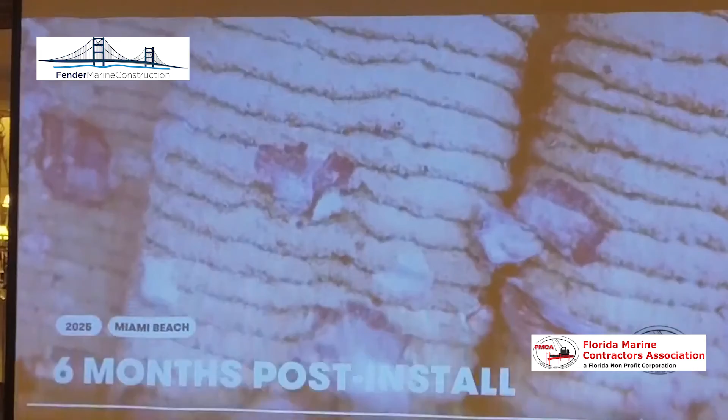So we went down to site, we took this video, we got in the water, and we sent it to them, and they were like, there's no way that's real. You had to put on those oysters overnight. There's no way oysters are going to grow on that fast. And it's completely real. You can see from the picture. This seawall is only 100 linear feet, but an adult oyster can filter about 50 gallons of water in one day. So you can think just what the impact of one living seawall has.

From our structural backing for our seawall panels to the living seawalls, the water quality benefits, the biodiversity enhancements that we're seeing, we're observing and testing this all with different universities in the area. So we have this data to support the panels themselves. For structural testing, we've done structural testing with University of Miami, showing strengths comparable to that of precast concrete panels, making it easy to plug into any project.

And for looking at what marine life we're seeing, we're doing ecological monitoring with FIU. We've already seen 36 different species, and they're already seeing indicators of coral growth right around the seawalls. So we're bringing back this marine life way faster than you would typically see. And we've also been doing some work with the Navy. We did win a grant through NAVSEA to work with them on some pilot projects and research testing too.

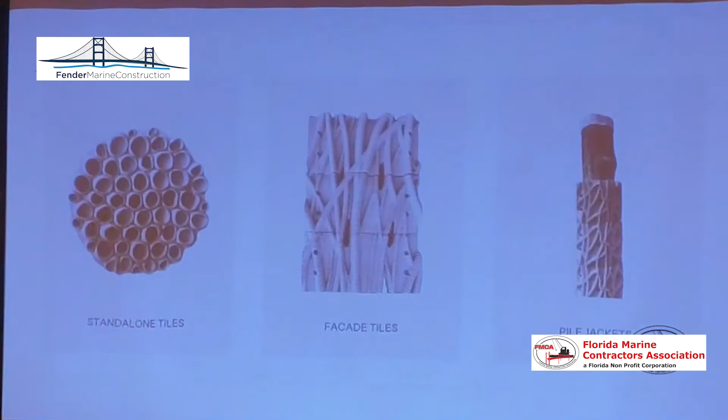If anyone lives over in that area and you're interested in stopping by, you definitely should make it over. What you'll see there is these living seawall tiles in the middle that mimic mangrove roots. They provide all the same benefits that your living seawall would, but in a modular tile system. And we have these standalone tiles. I've brought one up here, and if I can lift it and carry it, anyone can. They're only 30 pounds, some of them are 50 pounds, and the Longboat Key installation took just 2 weeks and only 2 guys in the water.

Those are our 2 main tiles that you can add to an existing seawall. We also have these pile jackets that you can surround and encapsulate a pile itself with, providing that closure around the pile and protection from degradation, but also this great benefit of restoring the water quality, marine life, and enhancing aesthetics of the area.

For the tiles themselves, just like our living seawalls, these are completely customizable. So any dimensions or designs, we customize it to your seawall, the height of your seawall, and exactly what they want to see. Like I said earlier, these tiles are modular and lightweight, so they're easy to move. Our mangrove root design tiles are 2 square feet, and they're about 45, 50 pounds. And our organic tiles are more circular or organic shaped, and they're only 30, 35 pounds.

We do reinforce these with basalt fibers, so they're still structurally reinforced, even though they're not the seawall itself. And they're all 2,000 PSI strength with the material that we use, and we're actually partnering up with ECOncrete. They have a great bio admixture that you can add in to materials to make it even better for the environment.

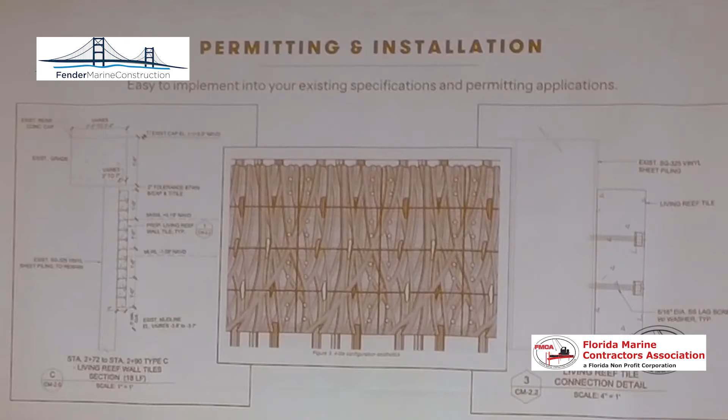This is that Bayfront Park project I was talking about. You can see the wall itself is completely covered in these mangrove root tiles, and the tiles are still underneath that cap area. So you get all these benefits of a living seawall without it protruding out further from the cap and having to go through permitting headaches. So we make it really easy to plug this in.

And this site right here, something that was really unique we didn't know about before is the vinyl. When water was splashing in, it was creating a lot of noise and creating this bounce back and kind of splashing over into the park area. And a lot of residents were kind of aggravated by some of the noise, so these panels themselves have helped reduce that noise as well.

Those were our first two things. So we started with living seawalls, went to living seawall tiles, and now we're noticing a great need for customized living shoreline areas. Living shorelines are growing everywhere, and we're now customizing to each site. What's unique and so great with 3D printing is, say if you guys were to get a project, come to us and say, can you manufacture something of this size, these dimensions with X, Y, and Z holes or shapes or spires on top of it? With 3D printing, we're really able to customize that and make some super unique designs.

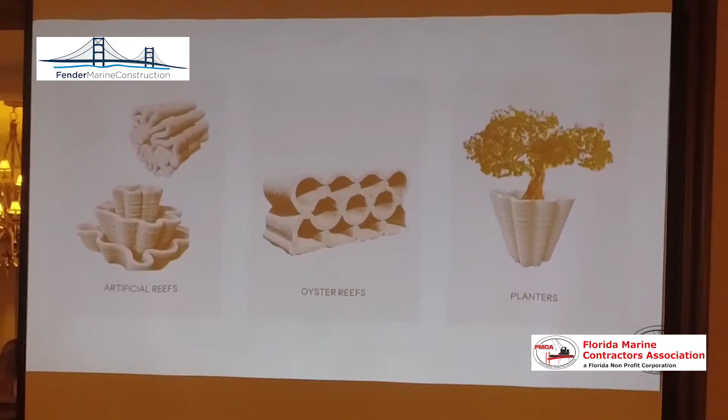And then finally, our planters, these can be used either upland or in the water. If you're struggling and you are trying to get mangroves to take root, but they're getting consistent wave action and damage, this is a way for you to encapsulate that mangrove, provide it some space and time to grow, and then it will grow over, and eventually you're left still with this great benefit of this design left in place, protecting the mangrove and able to blend back into the environment.

And all these designs are custom for different projects, so these are just some showcase examples of what we've done before, but we're able to really customize to the site itself. And we do have a team in-house that works on each unique project.

So for example, these oyster reefs for Governor's Island Reef in the New York Harbor, Billion Oyster Project actually reached out to us. They're a huge nonprofit working in New York, actually one of the largest working on oyster restoration specifically, and their goal is to bring 1 billion oysters back to the New York Harbor by 2035.

They wanted to work with us to create a design that would give them even more surface area and space, along with some other benefits like this flat base that we developed with them, reducing the design itself from rolling over or tipping. And we created all these custom features that you can see here, and they're really loving it. They're looking forward to getting more and more from us as we move on in the future.

Now, what are some incentives for all of these products that can help you win projects or can help with bringing in living seawalls and making it a better deal? So first being that they qualify for environmental mitigation. In Broward and Miami-Dade County, they're completely exempt from the county level mitigation. Usually you're required to go out with riprap a large amount. In both Broward and Miami-Dade, a living seawall does not require any riprap.

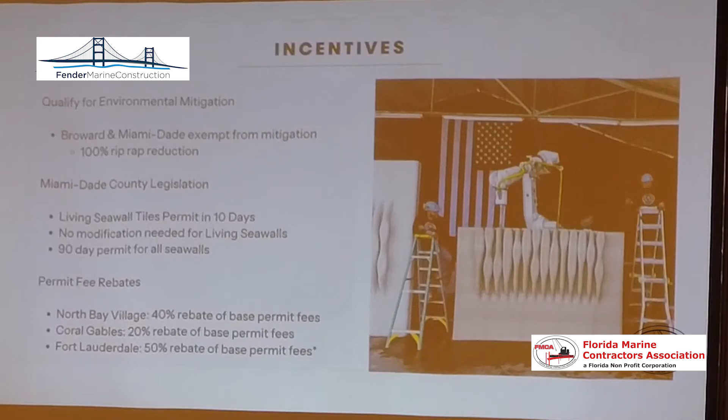This might be more regular for other areas around the state, but this was huge legislation for Miami-Dade County. Like I said earlier, it was taking 1 to 4 years just to get a permit in Miami-Dade County. Now also in Miami-Dade County, no modification is needed for living seawalls. You can plug in a living seawall and just do an as-built straight from concrete.

And then living seawall tiles, what I showed you, our second product, you can actually get a permit for these in just 10 days. It's a very fast process to just provide an enhancement to your seawall. And with all that, there's other areas in Miami-Dade County and in Broward County that are providing permit fee rebates for a living seawall. This is happening in North Bay Village, City of Fort Lauderdale, and Coral Gables, where they're all providing 20 to 50% permit rebates. So you're getting discounts on those fees if you do a living seawall.

Our facility, where we manufacture all our panels, is based on the Miami River. You can see in the image on the right here, we're growing out. Just 2 years ago, we had only 1 robot. Now we have 3, and we're expanding and getting more robots this year as we get larger projects. We are located 5 minutes from the airport, so if anyone ever wants to come by and see it in person, please come on by. We'd love to host you.

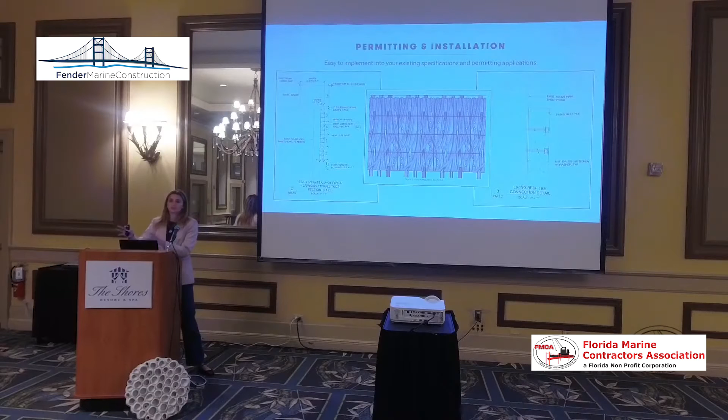How tall are they normally? We see all the damage done in the tidal zone, worms and everything attached to the bottom, but some spots are pretty deep. Yeah. Right now, the pile design that we've developed is probably about this high for each piece. We can make that a lot bigger. So the project where that design really came from, they were about this big for each piece.

Yes. How do you quantify, what's the unit of measure, or what's the difference? A flat concrete wall still gets growth on the front of it. Right? It's not like these concrete walls don't have marine growth, through the mud line up to the mean high water line. How do you quantify or substantiate that the growth y'all are generating is better than a flat face concrete panel? Yeah, that's a great question, and one we get a lot of the time, because oysters, filter feeders, they still just love concrete material.

What's really great about our seawalls is, one, it's faster recruitment, so you're getting that recruitment a lot faster than you would for a usual flat seawall. And then we have a lot more surface area on our seawalls. So our concrete panels actually have 2 times the surface area of a flat concrete seawall panel. And so we're quantifying how fast things are recruiting to it, the number of species that we're seeing in that space too, and how fast they're coming into the space.

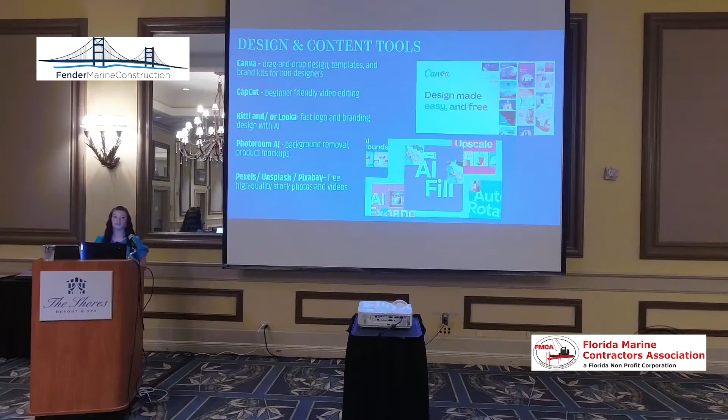CapCut, maybe you've got some videos, you can do a before and after of those seawalls or any products that you're building. Maybe you're doing some redesigns, whatever it may be. You can take some videos and quick edit. They have templates as well that you can put together. And all of these are listed on that useful resources list. And then some of these other ones, I don't use Kittl or Looka as much, but you can use those to get some ideas of templates. Again, if you're not design savvy, there's lots of options out there where they already have it ready and you just have to drag and drop.

And then Pexels is great. If maybe you don't have as many photos, but you do want to start posting, you can search for like a seawall or a dock and then add your information that you want and post on your page. So this is going to be great for when you're writing your captions or you're writing emails, your branding, any of your product guides. You can use these.

ChatGPT is a big one that's becoming very popular. I'm sure all of y'all have heard of it. ChatGPT is great if you're looking for maybe caption ideas. You can put in there, hey, I'm doing a post about a brand new dock I just did. It was a custom. I used this decking and I have a boat lift in there. Give me an idea for a great caption to catch someone's eye. And they'll give you lots of different options.